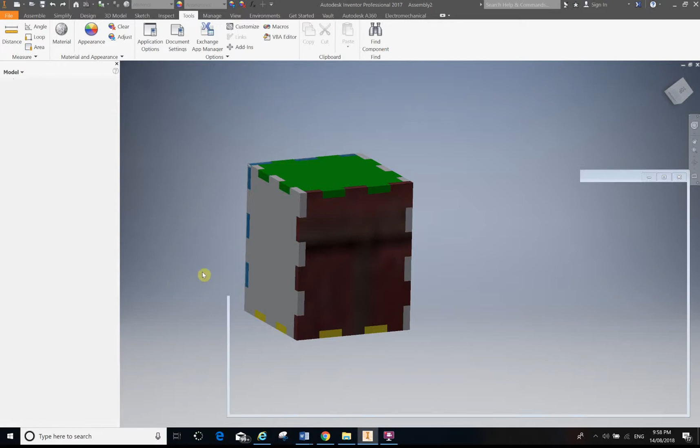So here goes. You're going to start off with a new drawing, then create a sketch on a plane. It doesn't matter what plane I select. This part does matter though: start with a rectangle that is a center point rectangle. Click on here and we're going to make our rectangle 50, tab, by 60.

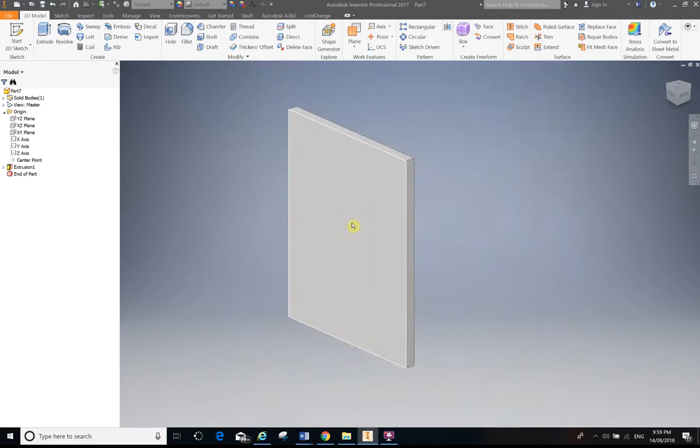Press enter, there's my 50 by 60 rectangle. Finish the sketch, and you're now going to extrude. We're going 3mm because that's the thickness of the material we're using. I'm going to select this surface now and create a sketch.

With this, the first thing I'm going to do, if I go Control Tab, is make one of the fingers for our joint. You can see if I go again, they all interlock into each other, and I'm going to be making this shape here. We need to consider how that works, so it's a 10 by 3 rectangle that I need to cut out.

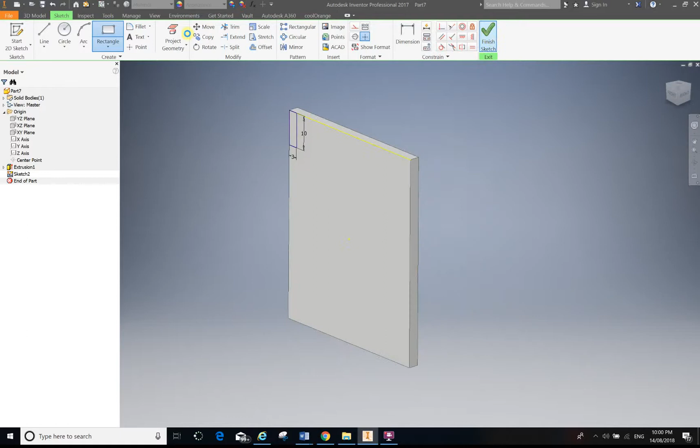So here's my shape. I'm going to change my rectangle tool back to a 2-point. Wait for that green circle to come up, so I've got 3, tab, then type in 10, press enter, finish my sketch, and extrude, but change it so that it cuts, just by clicking there.

Next thing, I'm going to go to pattern up here. I'm going to select the feature, and at the moment it's glitching, so just move your view around a bit by holding shift and the center mouse wheel together and moving the mouse. Select the feature I've just made, select on direction, select the edge I want it to go down. If yours comes up wrong like that, just click this flip button.

We're going to want 3 of them, and the spacing is going to be 20mm. The reason it's 20mm is because it's measuring from that back corner, sorry, from here to that top corner every time it does a spacing. So you'd think the spacing would be 10, but it's actually measuring from this corner to the next corner of that one.

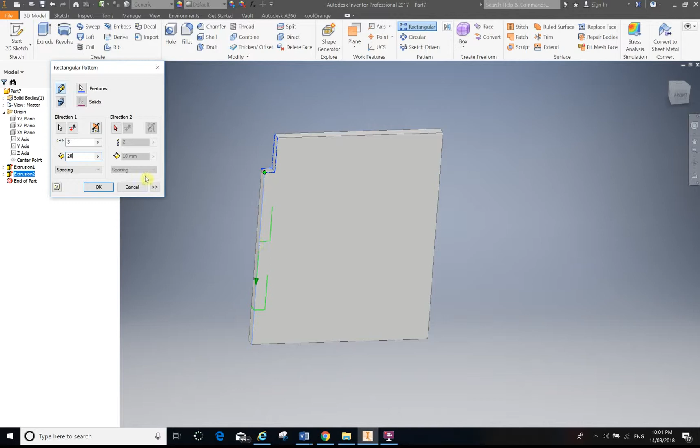So there you go, that side's done. We now need to transfer the exact same sized fingers over to here. However, what we want, and I'll show you on this one, is so that they click into each other, you want male fingers opposing female fingers. So I've got a female finger here and a male one here, so they'll click into each other when we get the shape together. To make that work super easy...

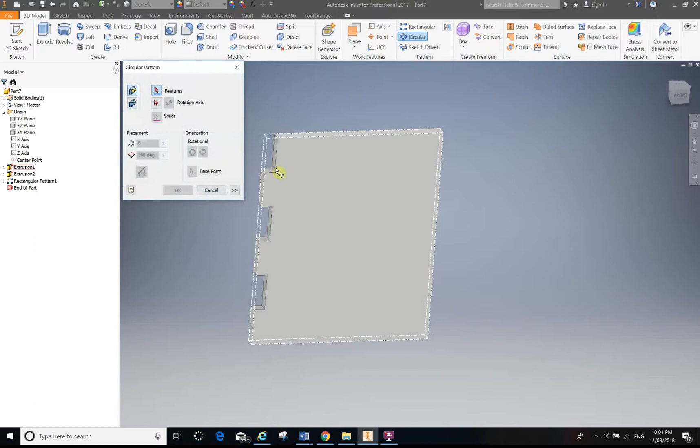I'll go back to the drawing I'm working on. I'm going to use the circular pattern. Select the features I've just created - if you select that one, you only get 1. Come down here, there's the 3 that I want, I'm just going to cancel because the whole thing's been selected blue, so cancel, and pivot this around like that. We'll try again, circular, come down here, select my 3, so you see how there's only 3 that are blue now, not the whole thing.

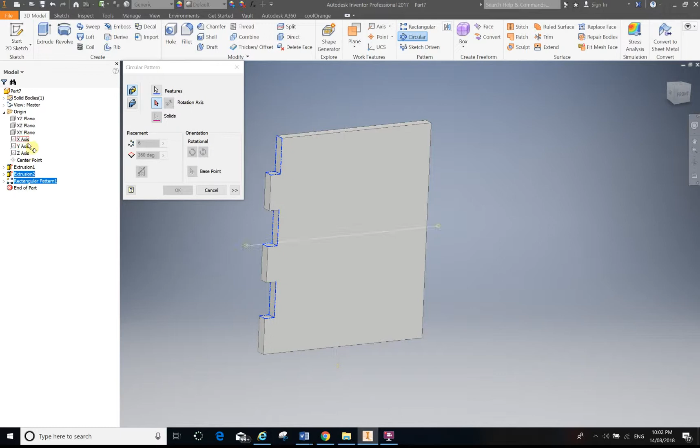Center axes, I'll click on that, so there's my rotational axes, and your screen will look like this to begin with. Left click on that arrow, and you need to find the axes it's going to pivot around. For me this time it is my Z axis. Looks a bit crazy, but if we look in this dialog box, I've got 6 placements. I only want 2, so change that to 2, and there's how I've created that shape.

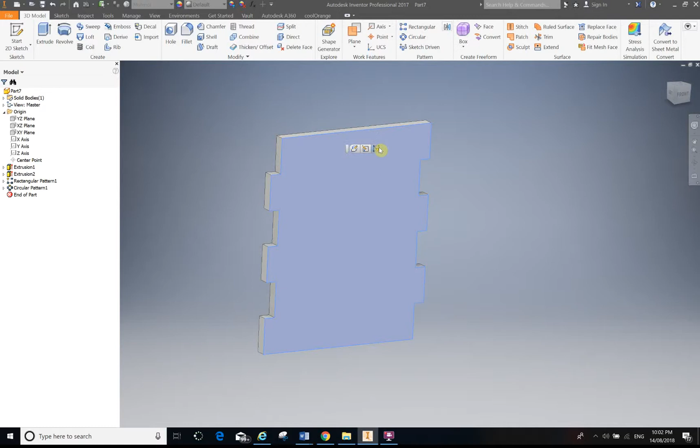The next part, guys, is to do the cutouts on the top. You'll be working from your drawing that you've sketched in your book, which we've done previously in class. So what we need to determine is that this next one - if I go rectangle, make sure I'm getting that top line, left click, 10, tab 3 - that's the cutout.

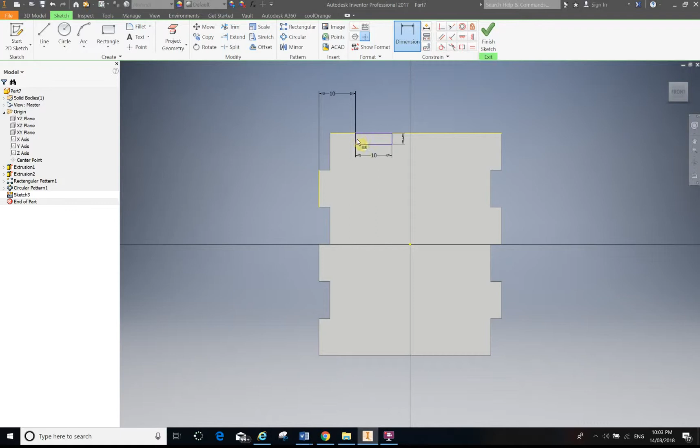But I need to offset it so that it is 20 mil from this edge. So I might be able to select that edge and then there - sorry, not 20, 10. So I type in my 10, and now I'm 10 mil off that edge to there. If you went off this one here, your number's going to be 7 because we've got a 3 mil cutout. But you should be able to click there and then to the top of our rectangle.

Finish that, and you're going to go extrude, and select cut. And then I click OK.

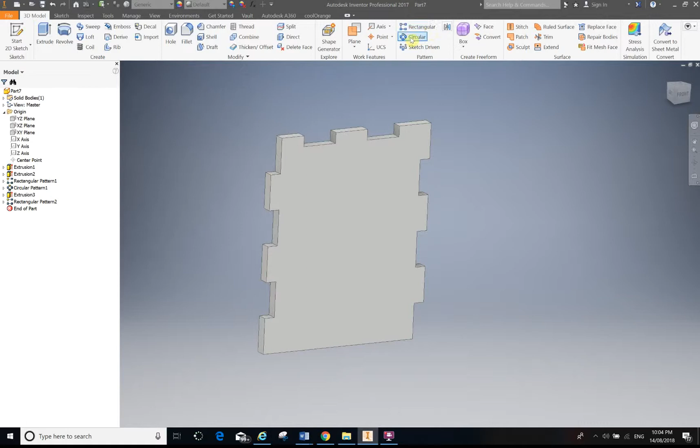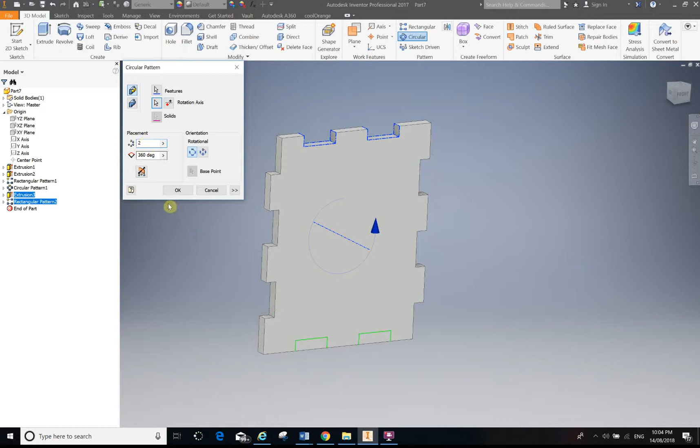Same as before: rectangular pattern, direction on an edge, flip it so that it works, 20 mil for our spacing, click OK. I'm now going to go circular. You could use a mirror on this one if you wanted, because they are the same, but I'm going to go circular just to make sure it works, because that's what I've done previously. Select both my features, Z-axis again, happening 2 times, and then that's how you get that shape.

To take it over to RDWorks, I've already covered this in another video, but I'll go again. If I left click on that face, right click, export face as, that will create the DXF for you to cut out on RDWorks.

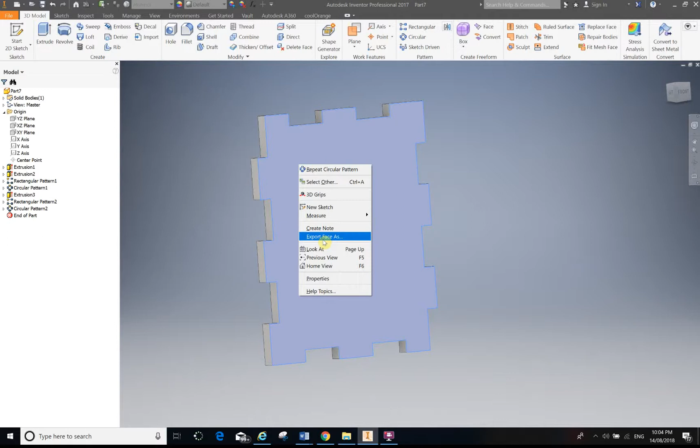I'm going to put up another video shortly that will show you how to create the top. It's probably even easier, but I'll do the side first, and then you'll be able to breeze your way through the top.